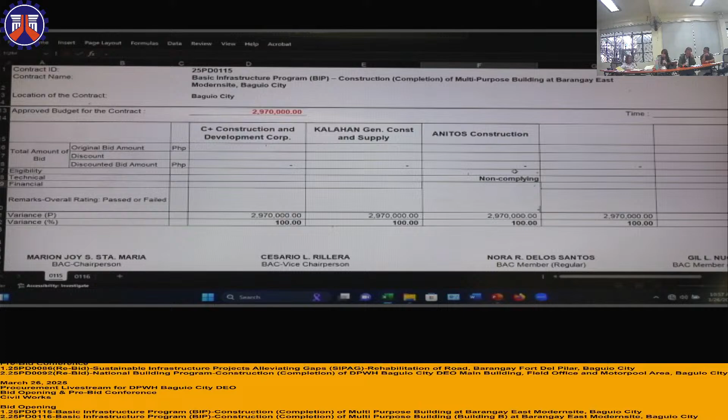For the same contract ID, name of bidder Kalahan General Construction and Supply, contract ID 25PD0115: all the documents submitted in the technical proposal are all present, in order, and updated. The BAC declares complying.

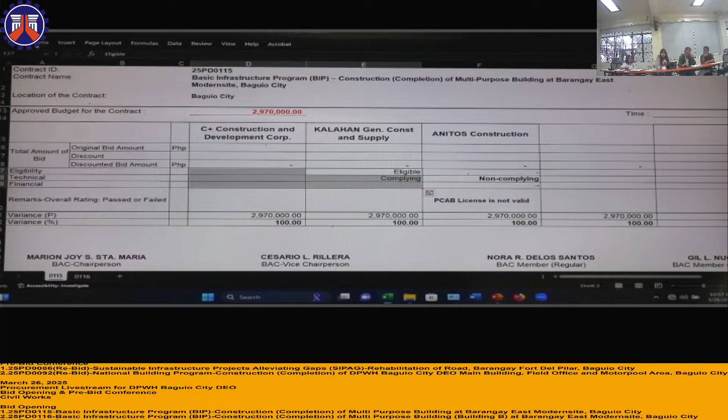For the same contract ID, name of bidder C Plus Construction and Development Corporation: after checking the submitted technical proposal, all the documents submitted are all present, in order, and updated. The BAC declares complying.

For contract ID 25PD0116, name of bidder Kalahan General Construction and Supply: all the documents submitted are all present, in order, and updated. The BAC declares complying.

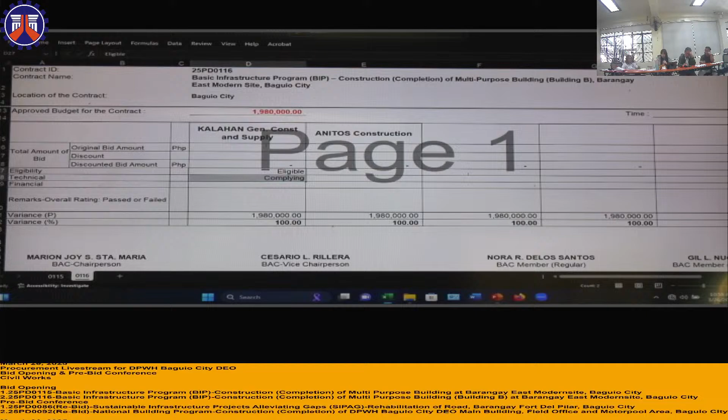For the same contract ID, name of bidder Anitos Construction: same reason, non-complying due to PCAB registration particulars not being valid. No representative.

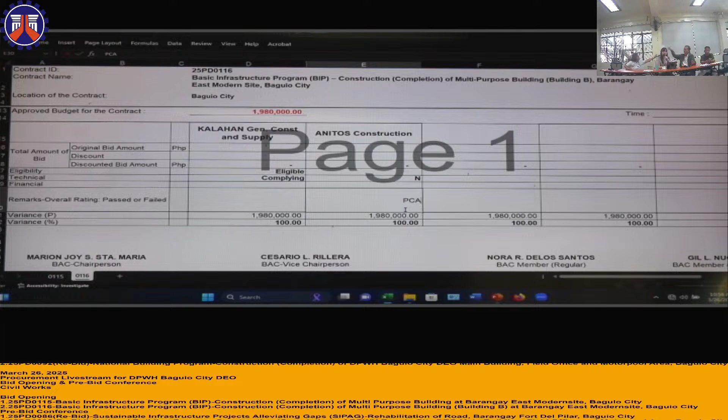So let's proceed. May we request the BAC secretariat to open the second envelope, or the financial proposal, of these bidders to evaluate the content of their bids.

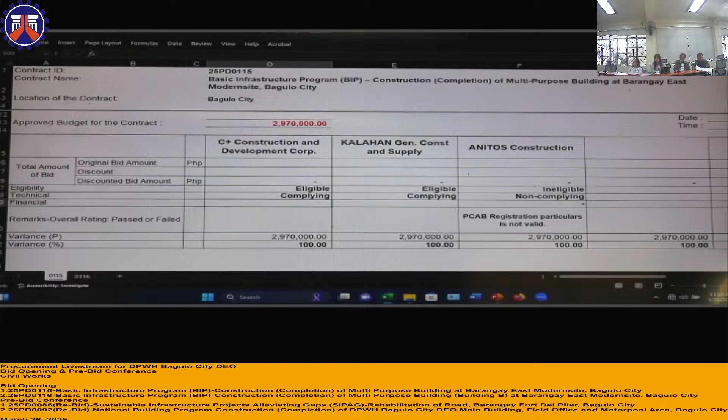To continue, contract ID 25PD0115: after checking the submitted financial proposal of C Plus Construction and Development Corporation, the BAC declares non-complying due to unsigned original of duly signed and accomplished financial bid form.

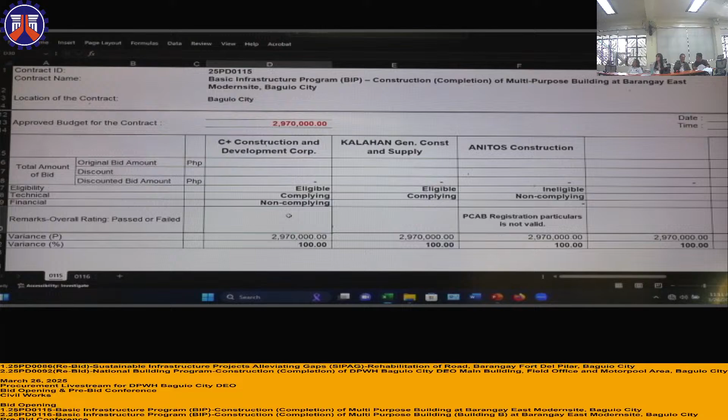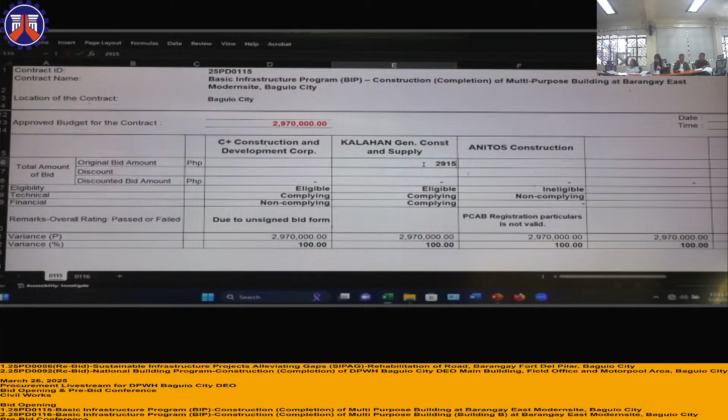For the same contract ID, after checking the submitted financial proposal of Kalahan General Construction and Supply, the BAC declares complying. The total price of bid in words: 2,915,564 pesos and 14 centavos. Discount offered: 5%.

May I request Engineer Delos Santos for the confirmation? For contract ID number 25PD0115, the bid of Kalahan General Construction and Supply is 2,915,564 pesos and 14 centavos with the discount of 5%, same as declared by our BAC chairperson.

May I request any representative from C Plus Construction and Development Corporation?

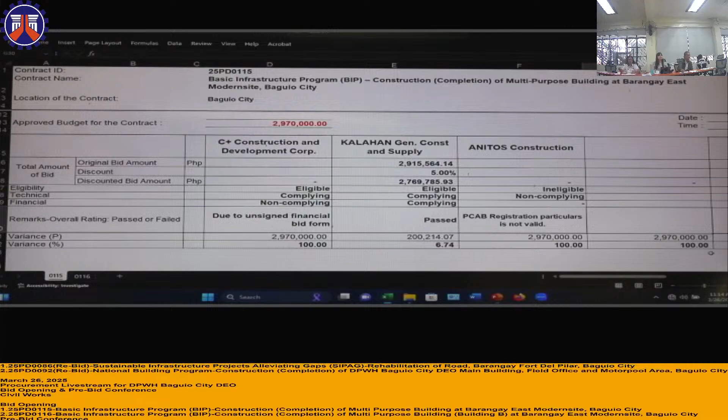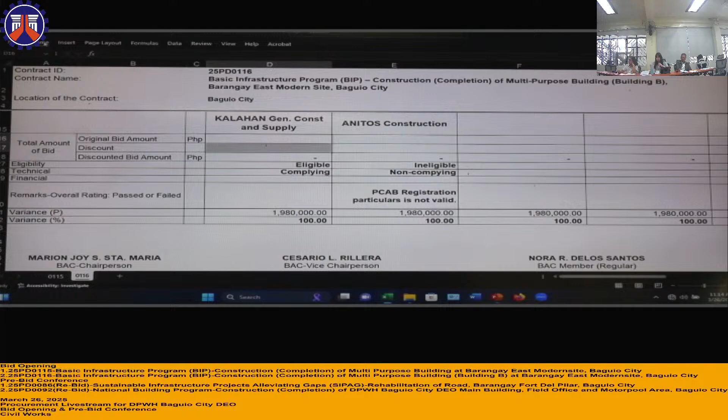To other contract ID 25PD0116: after checking the submitted financial proposal of Kalahan General Construction and Supply, the BAC declares complying. The total price of bid in words: 1,979,991 pesos and 28 centavos, with a 6% discount offered.

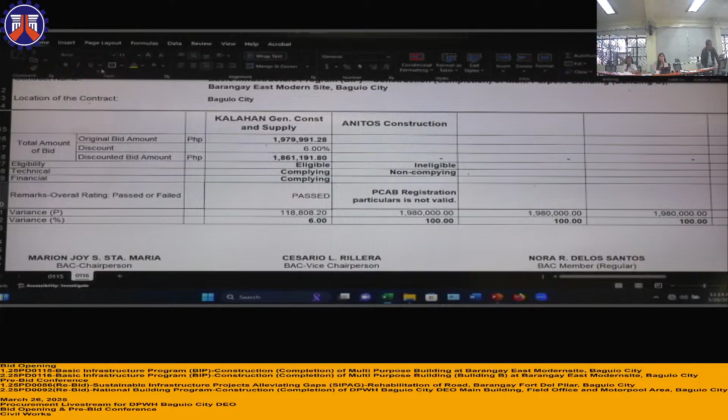May I request Engineer Delos Santos for the confirmation? For contract ID 25PD0116, the bid of Kalahan General Construction and Supply is 1,979,991 pesos and 28 centavos with a discount of 6%, same as declared by our BAC chairperson.

Do we have any comments or reactions from our witnesses or from our online viewers? None, sir? Okay, reminder to all our bidders: please note that all bids are still subject to post-evaluation and post-qualification. What we are looking here is the lowest calculated responsive bid.

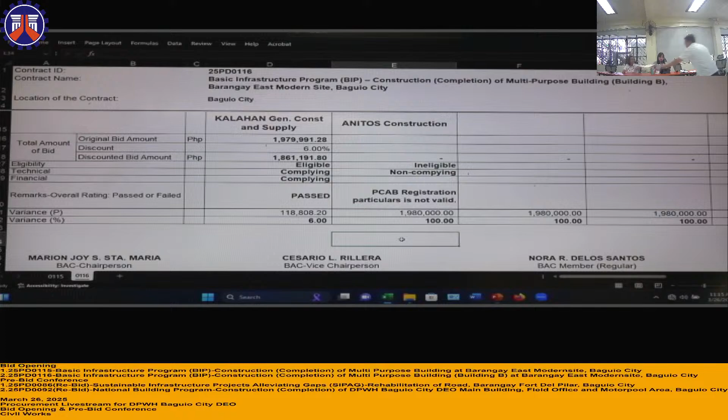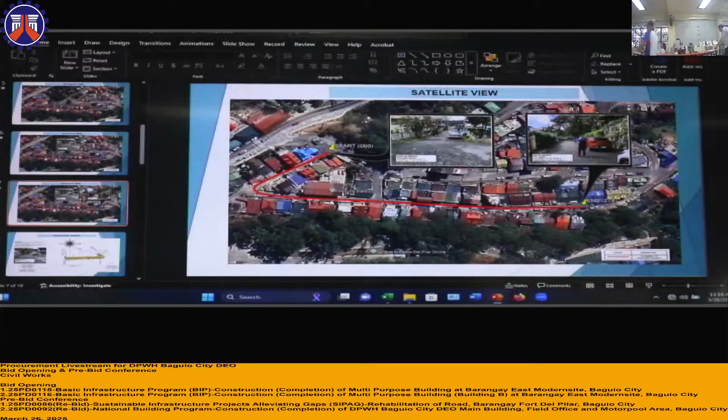Let's proceed to our second activity, the pre-bid conference of two infra projects. This is our invitation to bid. So let's proceed to the discussion of contract ID number 25PD0086, name of contract: Sustainable Infrastructure Projects, Alleviating Gaps, Rehabilitation of Road, Barangay Fort del Pilar, Baguio City.

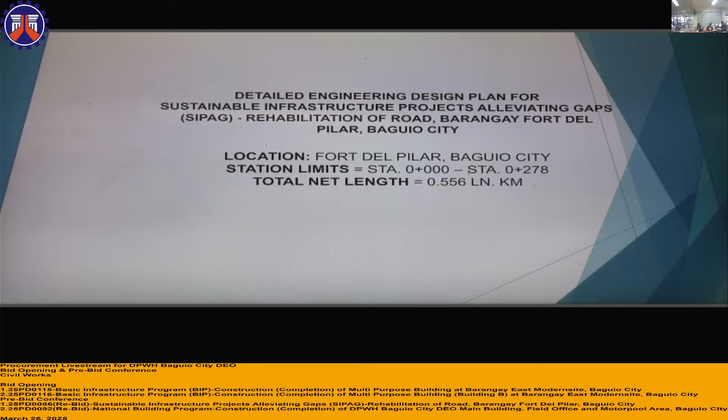Here is our geotag picture of project coordination with Ma'am Jacqueline Lumibaw with certification.

This is the summary of quantities. For Part B, other general requirements: project billboard, signboard, occupational safety and health program, traffic management, mobilization and demobilization. For Part C, earthworks: removal of actual structures, obstruction, subgrade preparation of common material. For Part D, sub-base and base course: aggregate sub-base course. For Part E, surface course.

Portland cement concrete pavement, 0.23 m thick, 14 days. For Part H, miscellaneous structures: concrete gutter cast in place and reflectorized thermoplastic pavement markings, color white.

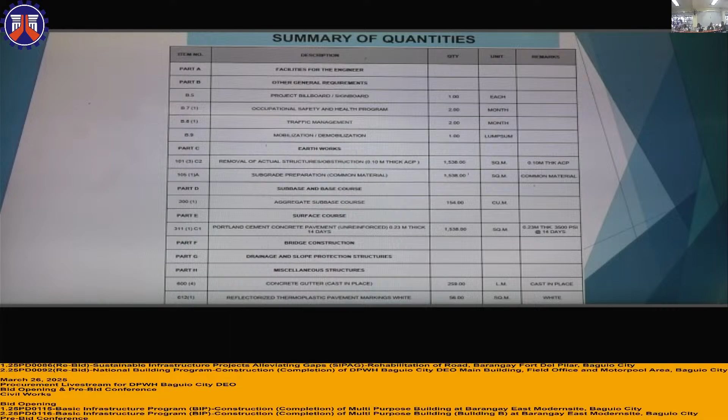Next is the satellite view. This is the main road. This is the entrance of Pinesville Subdivision, Fort del Pilar. The start of the project is the first right turn.

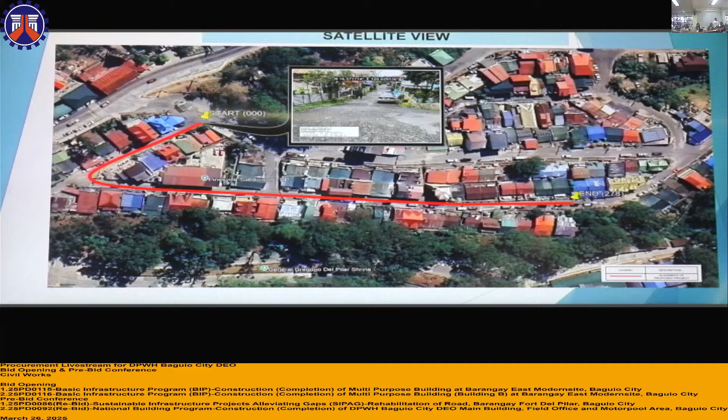The red line is the alignment of the proposed project. We start from Station 0, going to the Barangay Hall. This is the Barangay Hall. Then it goes straight until Station 278. This is the geotag picture of the start of the project, and this is the end of the project.

Next is the parcellary survey. At Station 0, we have the start of proposed PCCP pavement, 0.23 m thick, 3,500 PSI at 14 days. Proposed curb and gutter on the left side, and start of proposed reflectorized thermoplastic pavement with center line and edge line. This matches the line at Station 80.

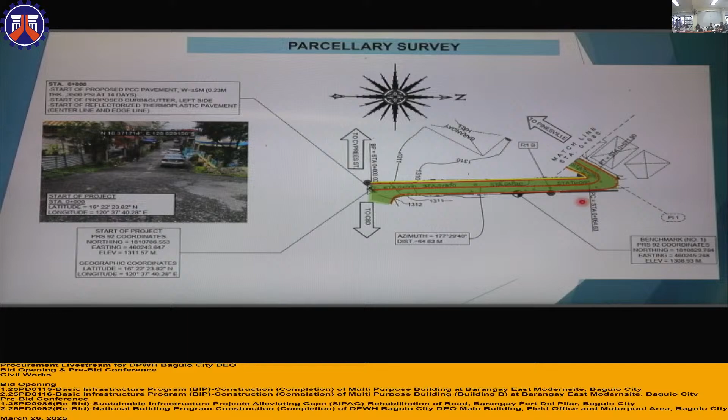Then next is match line from Station 80 to Station 160. Continuation of the proposed PCCP, continuation of the proposed curb and gutter on the left side, then continuation of the proposed reflectorized pavement.

Next is parcellary survey from Station 160 to end of project. Continuation of the proposed PCCP pavement ending at Station 278. End of proposed curb and gutter left side. End of proposed thermoplastic pavement with center line and edge line.

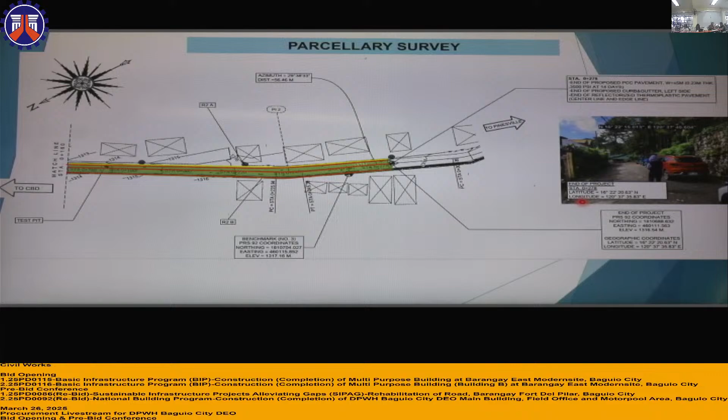Next is the typical cross-section of the start of project. Another typical cross-section, intermediate cross-section of the project at Station 100. Next is the end of project typical cross-section.

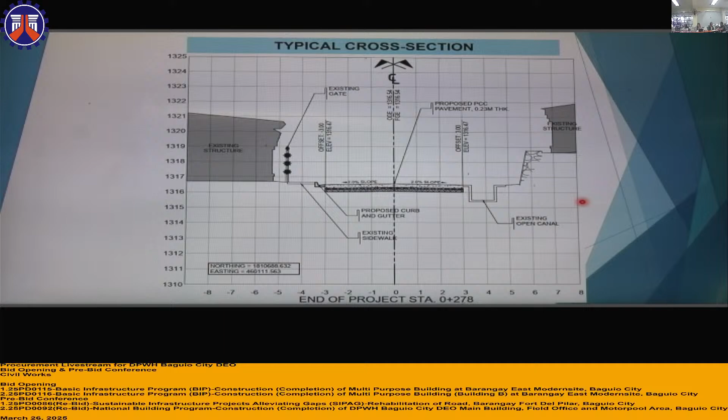This is the project billboard and frame details of the project. Next is the typical traffic management layout for the undergoing construction. Next is the reflectorized thermoplastic pavement marking details, indicating also the stations where they will be placed.

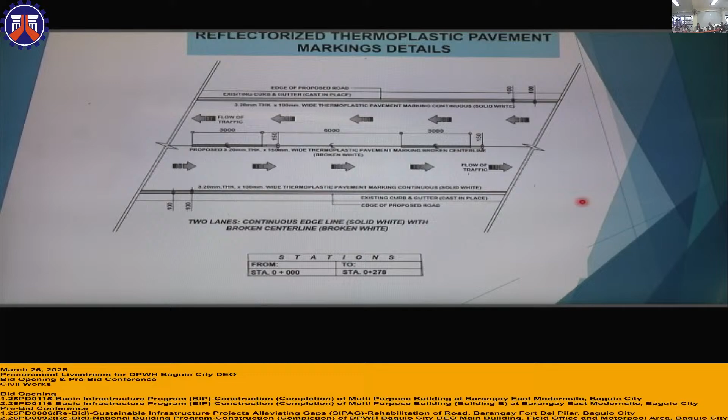Next is the typical curb and gutter details, for typical curb and gutter, and this one for driveway. Next is the typical details of 230mm thick PCCP, indicating the proposed curb and gutter, Portland cement, reflectorized markings, subgrade preparation, and also the design parameters.

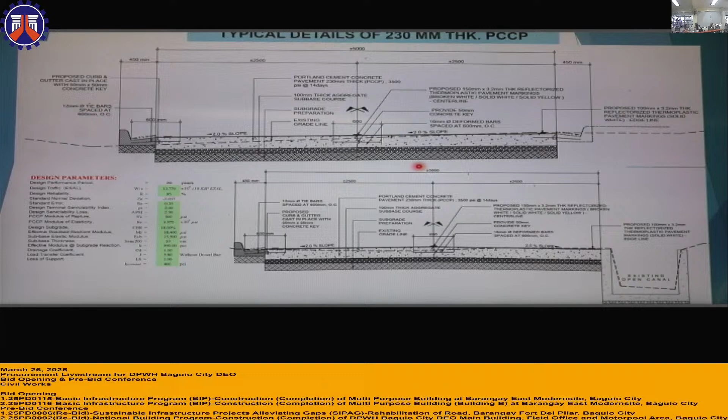Let's continue. For contract ID number 25PD0092, name of contract: National Building Program, construction completion of DPWH Baguio City DEO main building, field office and Motorpool area, Baguio City. Scope of work: construction of building. The approved budget for the contract is 19,300,000. Contract duration is 271 calendar days. Cost of bid documents is 25,000.

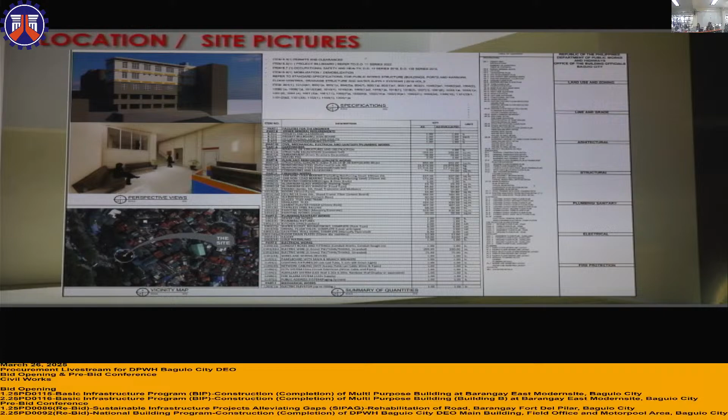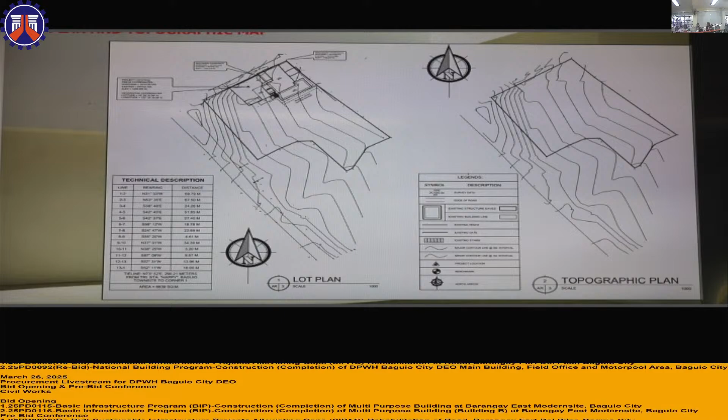Next, this is the summary of quantities. Also, this is part of the lot plan. Next, this is the lot plan and the topographic map of the proposed site. Next, this is the site development plan of the proposed project.

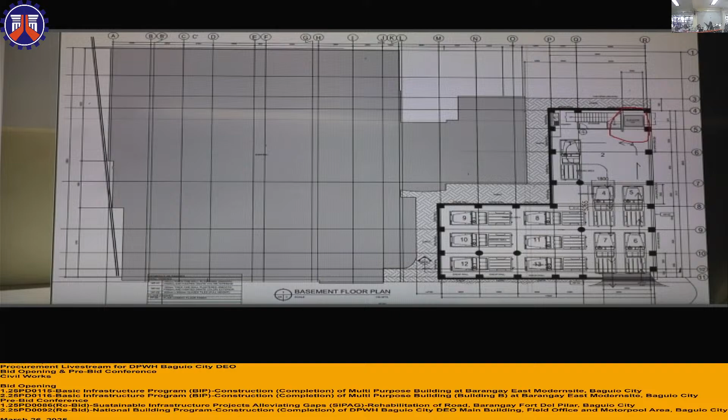Next, the existing building structure and existing parking are located in the ground floor area. This is the existing basement floor plan, and this is the proposed building with the elevator.

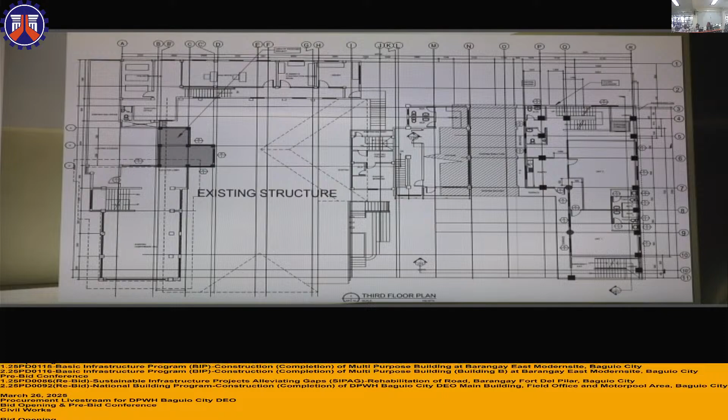Next, this is the proposed third floor plan. So in the scope of work, they provided the third floor, fourth floor, and the roof deck with the housing of the elevator.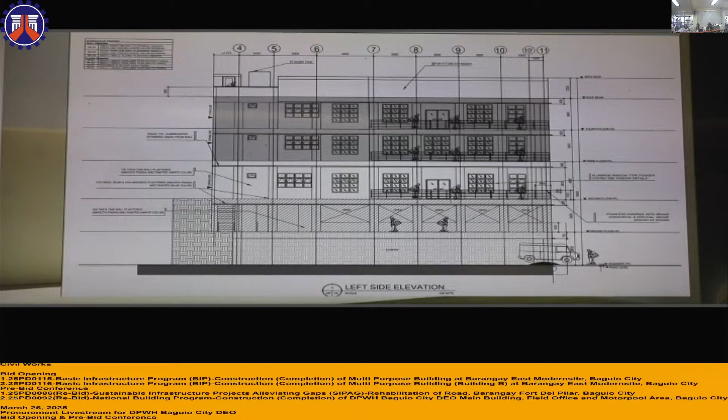So next, this is the longitudinal section of the main building. Also, this is the cross section.

The ground floor reflected ceiling plan, the elevation, the elevator, and details, sample details of ceiling framing. So this is the door and window schedule of the BCDEO.

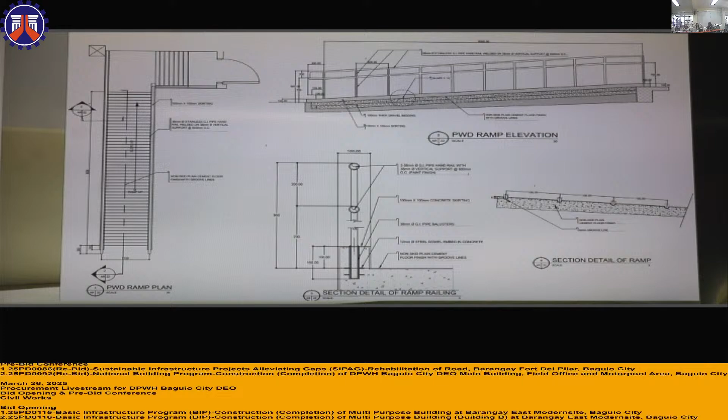And also, this is the detailed spot details for the ramp railings located at the existing structure to be constructed at the old building or the existing structure of BCDEO.

So the location of elevator, main stair lobby. This is spot details of stairs at the proposed building.

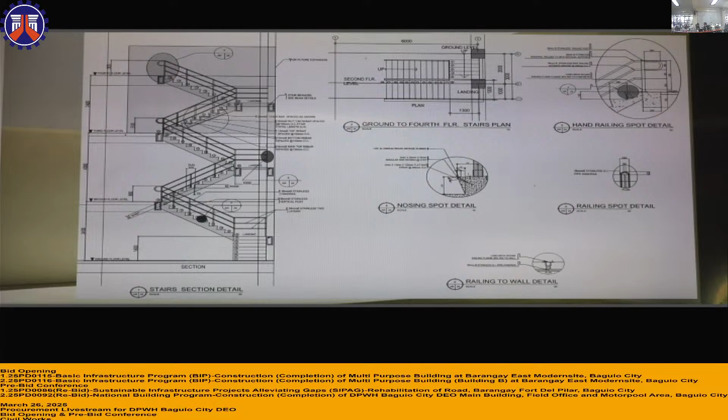So for the structural, it's already done. Lighting layout, 3rd floor layout, and sewer line plumbing.

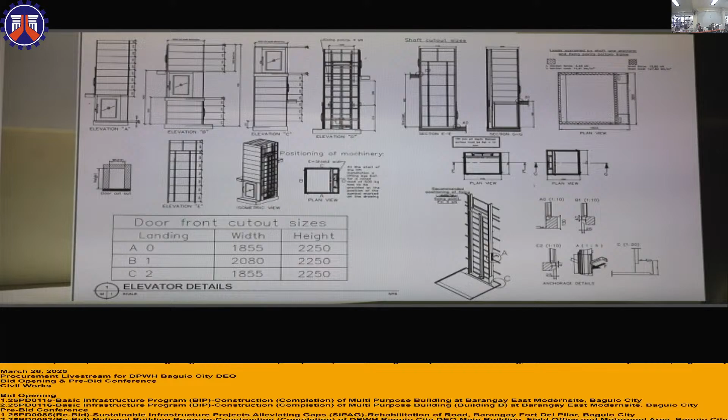And for the elevator details, which will be provided by the manufacturer, the proposed elevator car is 1.83 by 1.83.

So this is the BCDEO field office located at Kennon. This is the perspective and the vicinity map.

So this is the lot plan. It's adjacent to or near the Lion's Head, if you're aware, it's located there. This is the topographic map and the lot plan of the field office.

Next, this is the section plan. So for the BCDEO field office, the scope of work is the foundation and the first ground floor.

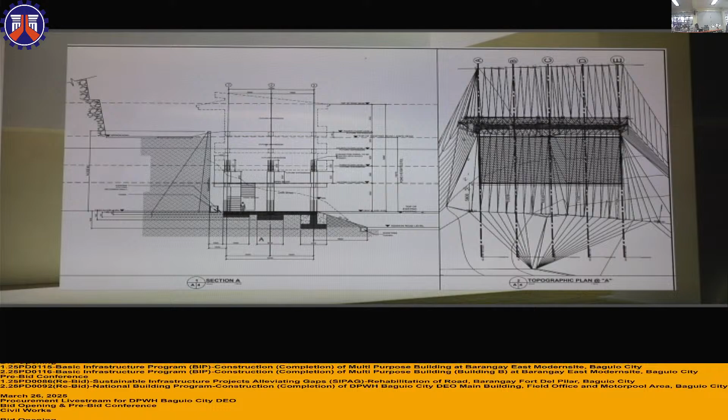This is section B again for the field office or the Motorpool area. Section, another section.

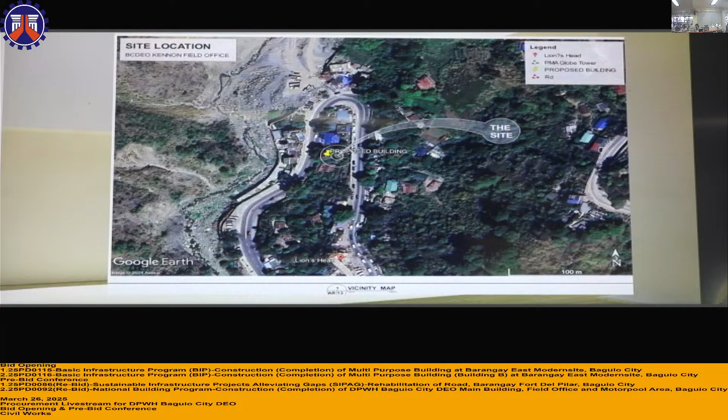So this is the site development plan and existing photos at the Motorpool, the vicinity map based on Google Earth. This is the existing or the proposed ground floor plan.

So we have a ramp here, and the proposed second floor.

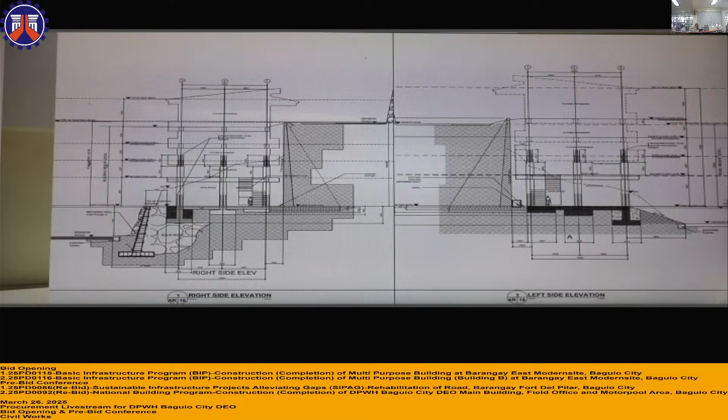For the front elevation, this is the front elevation proposed, and the rear elevation, right side elevation and left side elevation, cross section and longitudinal section.

This is the structural of the Motorpool area at the Kennon Road, BCDEO field office. The existing combined footing and section details, beam schedule and stair details.

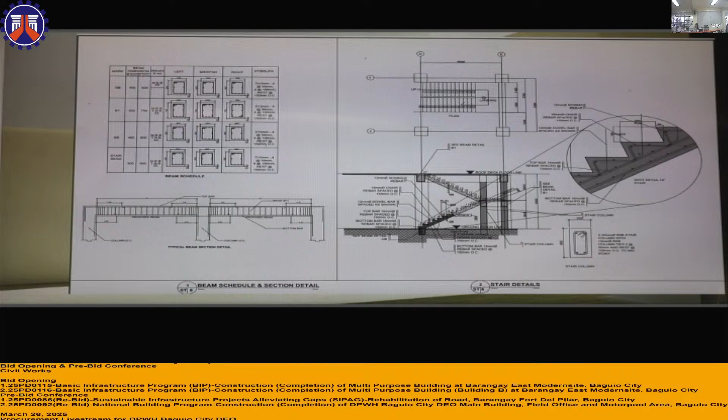And that is my presentation for the 25 PD 0092 National Building Program Construction of DPWH Baguio City District Engineering Office Main Building, Field Office and Motorpool area at General Road, Baguio City. Thank you.